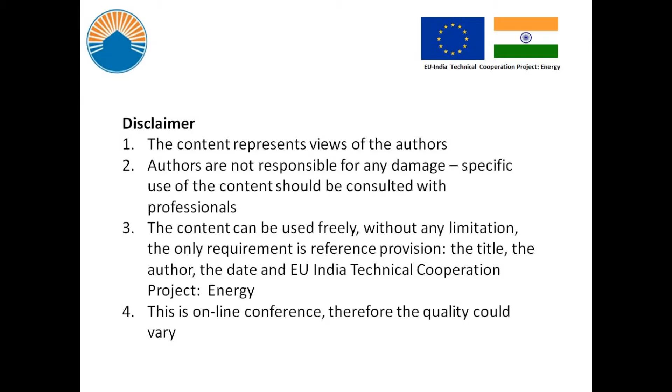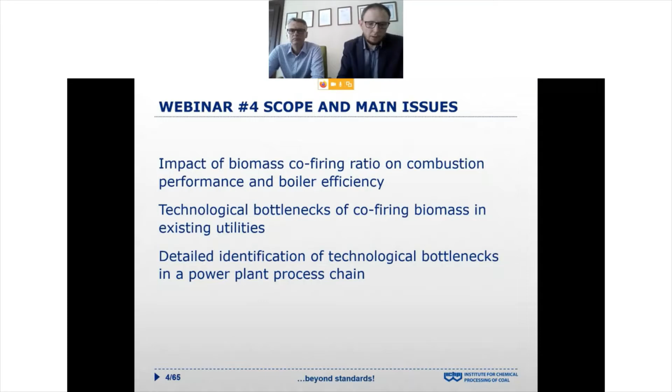Today we are talking about the technological bottlenecks. We would like to focus on the impact of co-firing on the combustion performance, including a specific change of the process from transportation up to the combustion and boiler.

In the previous webinars, we tried to identify the main technological bottlenecks. The main bottlenecks exist in transportation and storage, where the main effect is blocking due to the low density of the biomass. The second is safety issues regarding fire and explosions, especially for raw agro biomass, which is much easier to ignite and explode compared to coal.

Another bottleneck is preparation in terms of milling. If we consider pulverized combustion, pulverized boiler, milling is a very crucial part of fuel preparation. So the main bottlenecks, except for explosions, are inefficient milling due to biomass properties overall.

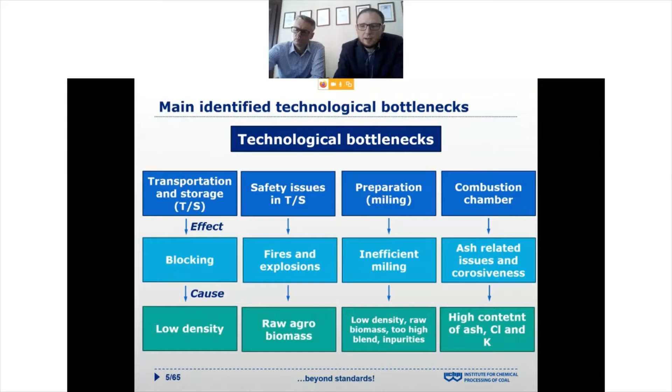Also, an important bottleneck exists in the combustion chamber: ash-related issues and corrosivity. However, we presented such an issue in the previous presentation. The reason is the high chlorine, sodium, and potassium content in the biomass.

If we consider the bottlenecks from another point of view, meaning technical and technological, we can also point out some of the main impacts of different processes on the technological and technical bottlenecks.

If we consider storage, we distinguish between the impact of weather conditions, but also the process of dusting and self-ignition. If we consider transportation, the main phenomena relate to lower biomass density, as well as the previously underscored dusting and ignition and explosion.

In milling, the main process influencing the bottlenecks is the grinding properties in terms of fuel, especially comparing coal with biomass if we consider co-firing.

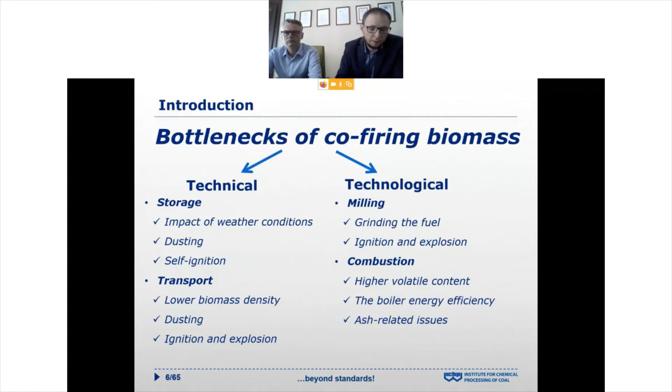And combustion - these bottlenecks come from the differences in fuel properties, especially the volatile matter content, and its influence on parameters such as boiler energy efficiency in an overall sense. But we would also like to show some particular things about that, and also ash-related issues, as you already know from the previous presentation.

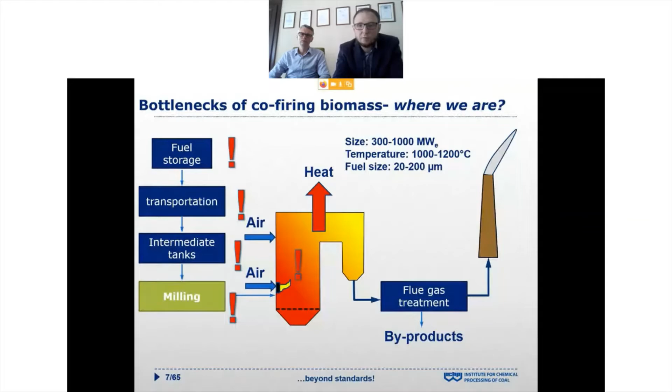For your imagination, we want to show where we are in the process. We distinguish between a few process chains in co-firing: fuel storage, transportation, intermediate tanks, milling, and the combustion chamber. We can identify different bottlenecks, and we would like to show you such examples in the real process.

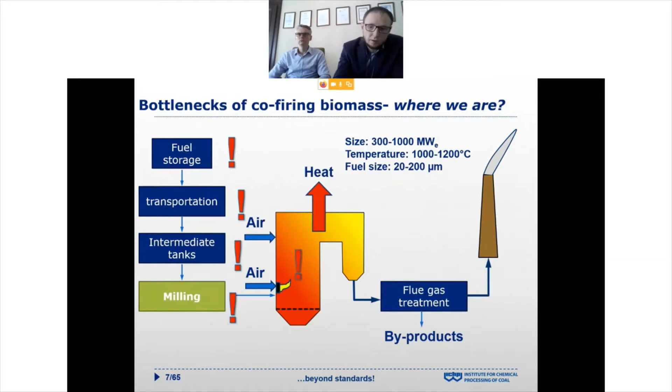It also depends on the kind of preparation and kind of combustion scenario. As you remember from the previous presentations, we consider different scenarios of co-firing.

One of them is the application of raw biomass in the form of bales - just co-firing of the raw biomass - but we identify one necessary thing: that we have to have a specific preparation system.

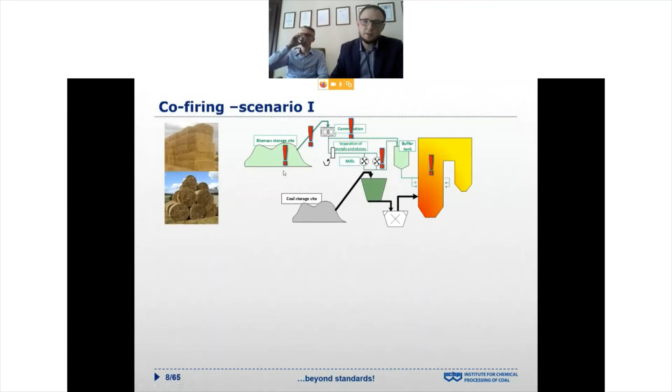Nevertheless, one of the main bottlenecks on the biomass storage side is related to dusting and self-ignition, especially for raw biomass, and especially if the volume of biomass is quite big, so the self-ignition probability increases.

Another bottleneck, if we consider transportation, is the blocking due to the low bulk density of the biomass. However, sometimes forgotten is the impact of impurities - mainly for raw biomass.

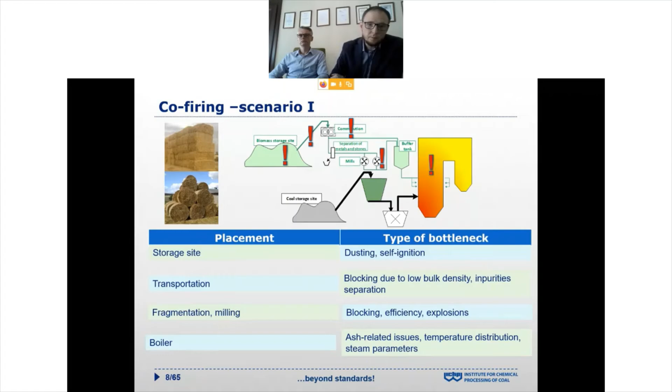It is very obvious and normal that biomass can include some impurities like soil, sand, or even rocks or concrete, or even parts of machinery. If some accidents occur, we have to put attention on impurities, also if we consider application of raw biomass or simple processed biomass.

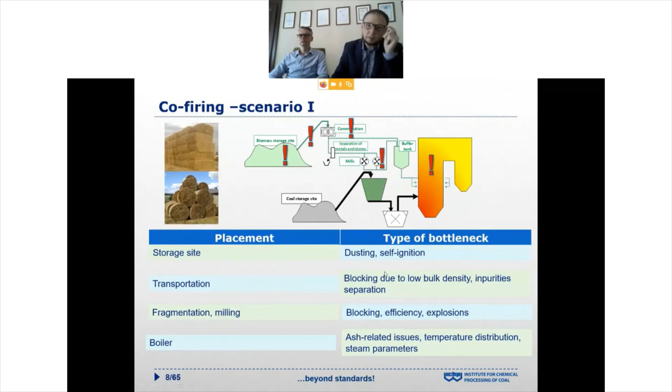The next point is fragmentation and milling, and we also identify bottlenecks related with blocking and decreasing of the milling efficiency. Also, air explosions are possible.

And finally, the bottlenecks in the boiler related to ash-related issues, but also some process parameters like temperature distribution inside the combustion chamber and steam parameters, especially the temperature of steam.

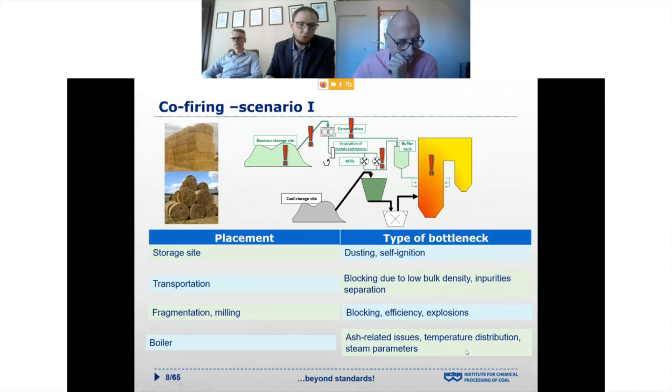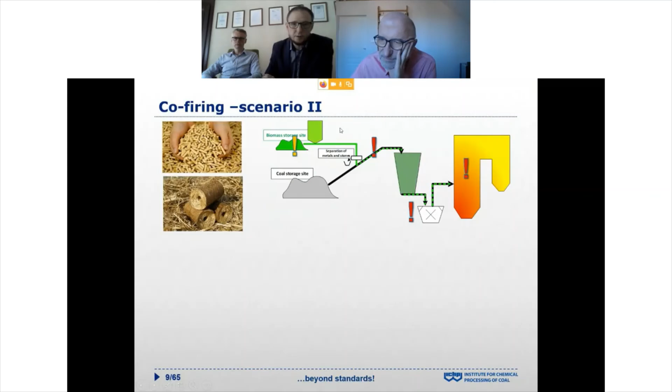The second scenario, just to remind you, we consider simple mixing of the main fuel coal with pelletized biomass. The advantage of such a solution is that we don't need a specific transportation system. Nevertheless, if we consider the same chains, we identify...

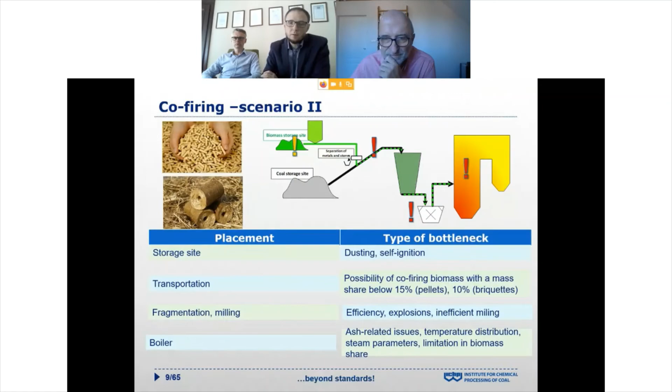...kinds of bottlenecks related to dusting and self-ignition. Nevertheless, for pelletized biomass, the dusting and self-ignition probability is lower compared to raw biomass. In such a solution, the main bottleneck is capacity, because we can increase the biomass share up to 15 mass% if we apply pellets, and up to 10% if we consider briquettes.

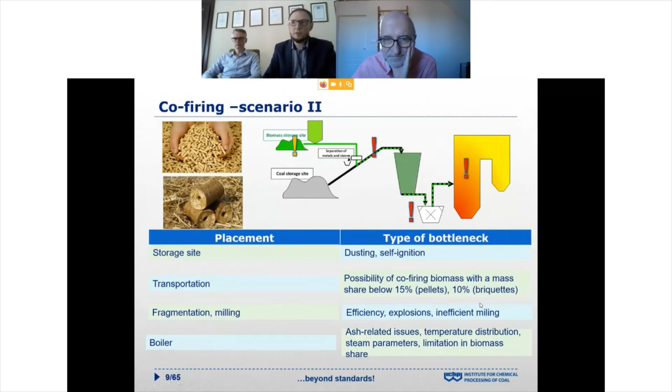We cannot increase the biomass share more due to some technological problems or limitations. Similar to the previous scenario, fragmentation and milling is an issue of efficiency and explosions.

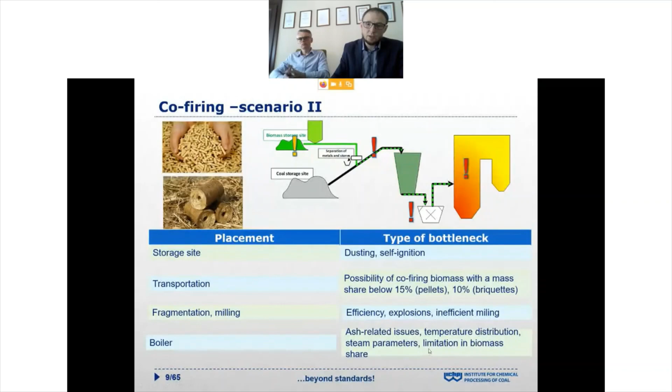In the boiler, similarly, the bottlenecks relate to ash-related issues and changes of temperature distribution. But we would also like to underscore the challenges related to the limitation in biomass share.

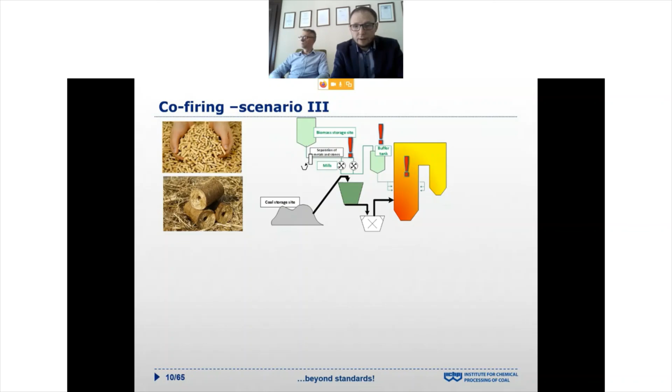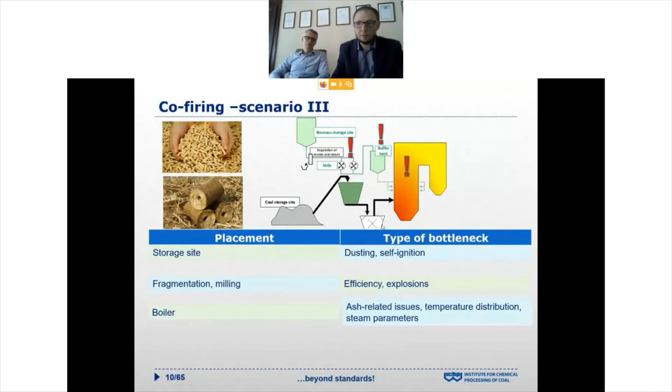And the third scenario, when we try to apply pelletized biomass, but we assume that we have an existing specific transportation chain, we can also talk about some dusting and self-ignition problems, but the probability is much lower compared to raw biomass, especially if we have specific transportation and storage equipment like silos with a specific detection system. The probability of self-ignition or fires and explosions is much lower, even though it is still possible.

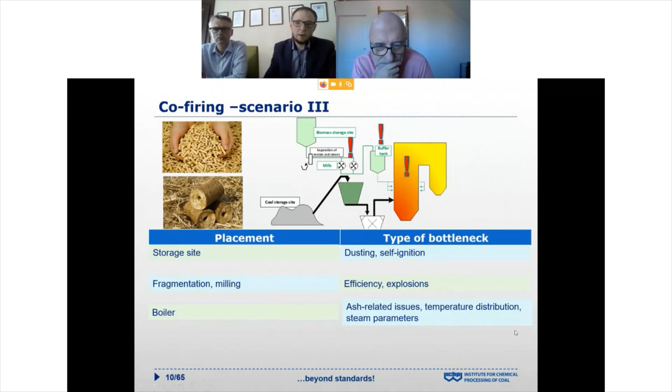And similar problems related to fragmentation and the boiler, depending on the biomass properties and biomass share.